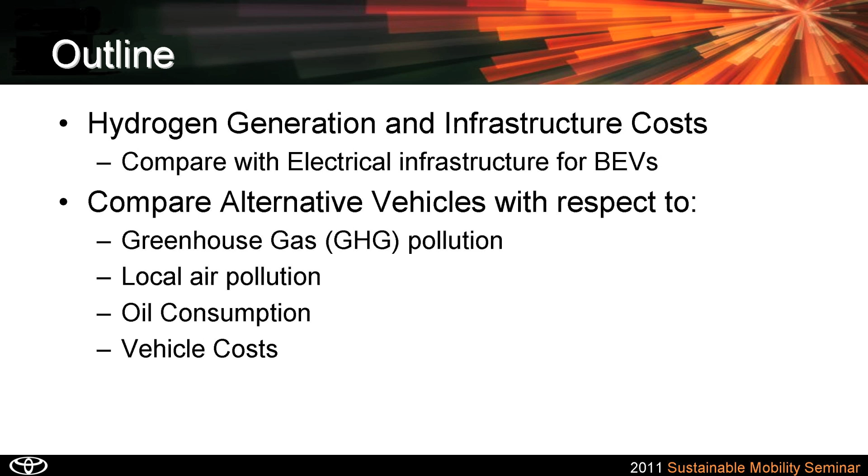Well, this is the outline I'm going to be using. Your program says I'm going to talk about hydrogen infrastructure, but I have a lot more information too. Number one, I'm going to compare hydrogen infrastructure costs with the cost of electrical infrastructure for battery electric vehicles. And I'm also going to compare alternative vehicles with these four attributes.

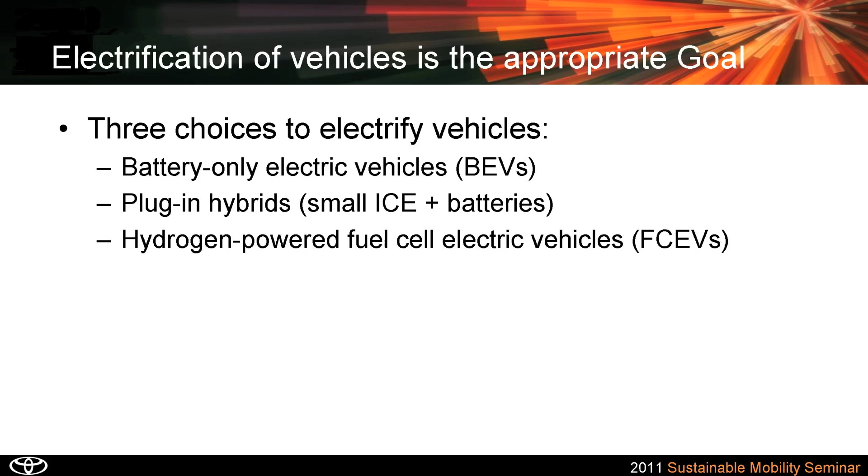I'm going to start off by saying we agree with the Obama administration that we need to electrify the vehicle in the United States. However, to power electric vehicles, there are three options. We can have battery electric vehicles, as you all know, and plug-in hybrids. Of course, the administration supports those two, but they've totally neglected, or tried to kill, the hydrogen-powered fuel cell vehicle program, which is another way to drive electric vehicles.

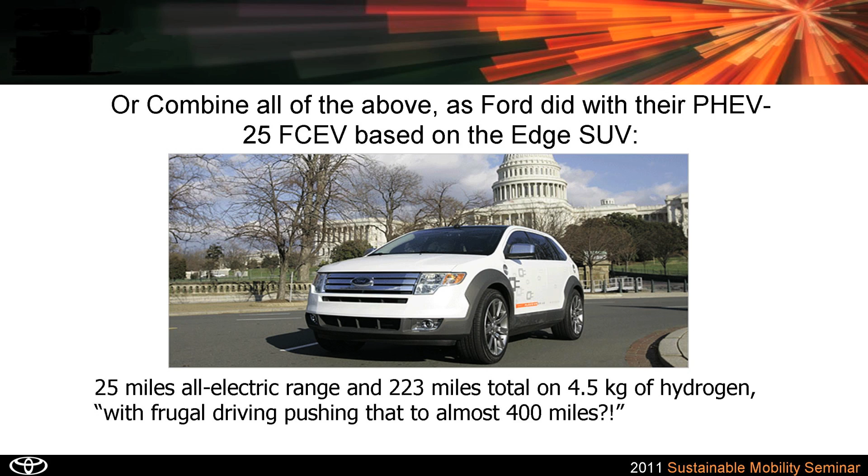In terms of plug-in hybrids, to the best of my knowledge, this was the very first plug-in hybrid electric vehicle made by a major auto company. But this happens to be a Ford fuel cell electric vehicle. They put a bigger battery in it, so it had 25 miles all-electric range. I had the privilege of driving this around Washington, D.C. several years ago, which was quite an experience.

I have two sources of data in this presentation. One are the simulation models that were referred to, put together by the National Hydrogen Association. And also I'm going to refer to data from the McKinsey & Company report on alternative vehicles in Europe.

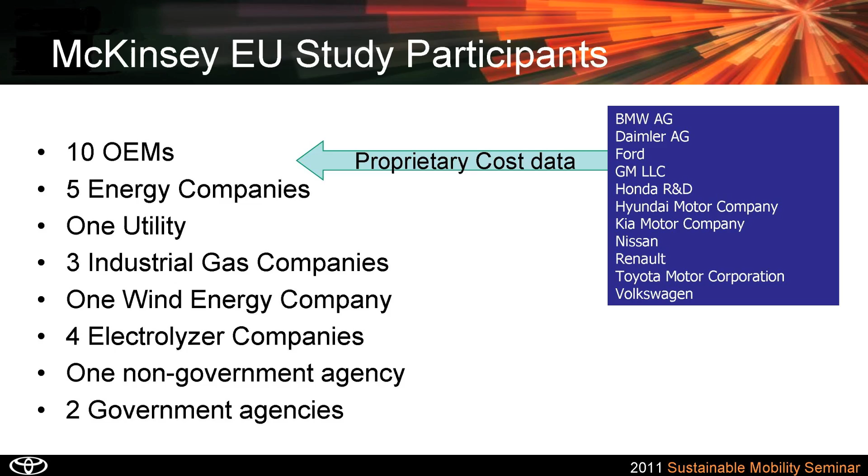The McKinsey report had even more participants. In particular, they had the participation of 10 OEMs, automobile companies, the 10 major companies. And why that's important: the auto companies provided proprietary cost data to the McKinsey analysts. So when I get toward the end of my presentation and talk about the cost estimates from McKinsey, I think they have particular credibility.

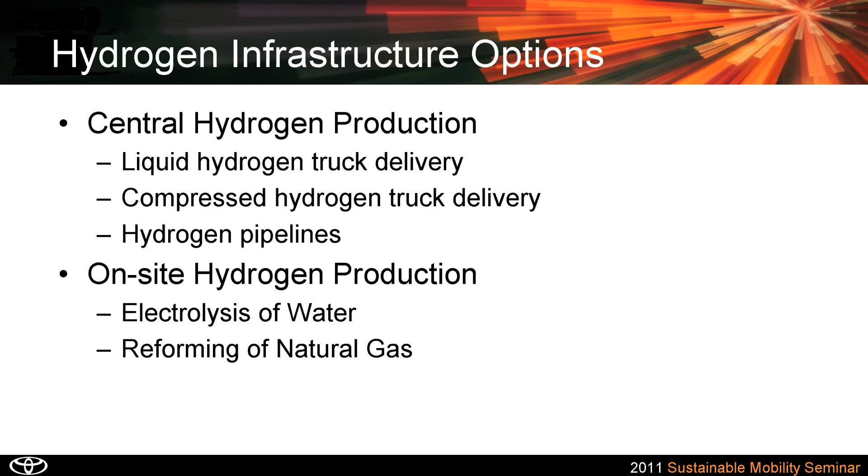In terms of hydrogen infrastructure, most of you probably know this, but almost all hydrogen today is made at a central production plant, mostly by steam methane reforming. But once you make the hydrogen, you have to deliver it. In the United States, there are three major ways: you liquefy the hydrogen and deliver it by truck, you compress it and deliver it in a tube trailer, or you build hydrogen pipelines. All three of those transportation options are used in the United States, delivering thousands of kilograms of hydrogen to industrial users every year.

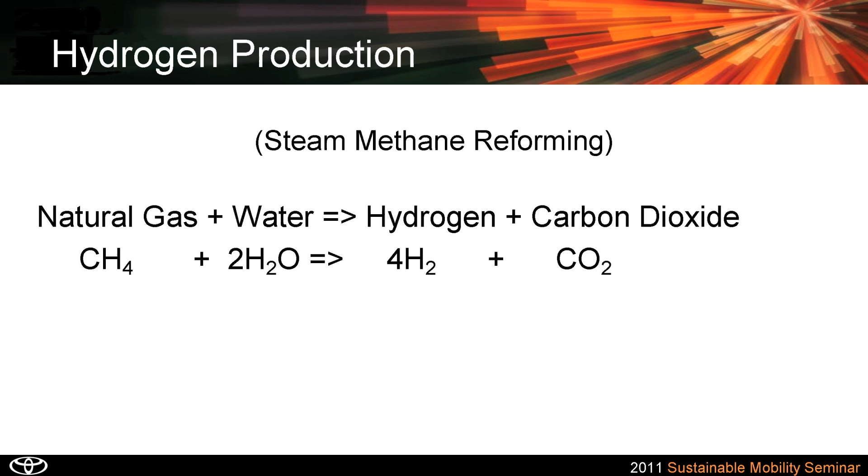But for refueling vehicles, you can also have on-site production, either by electrolyzing water or by steam methane reforming of natural gas. In terms of steam methane reforming, you use natural gas plus water to produce hydrogen, and here's the chemical equation for that. The reason I put this up here is to demonstrate that one carbon atom produces 4 hydrogen molecules.

And that's important because half the hydrogen comes from the methane and half comes from water. So you might say that this is already 50% renewable. And that's one of the reasons if you use hydrogen made from natural gas in a fuel cell electric vehicle, you cut greenhouse gas emissions by about 50%.

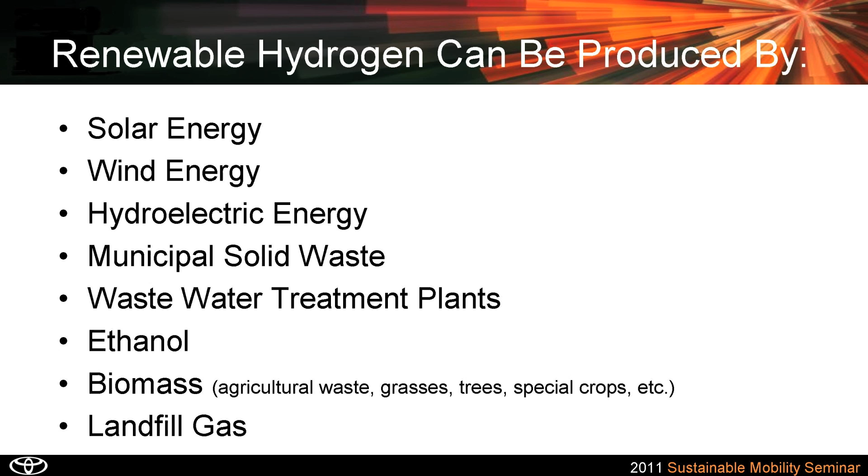This is a chart put together by Charlie Freese at General Motors showing the hypothetical upper bounds of what you can do. For example, from biomass, you could produce enough hydrogen for 395 million cars, about 3 times the US car fleet. Solar: 21 billion cars, or 16 times the US car fleet. Wind: 9 times the US car fleet. And geothermal: about 2 times the US car fleet.

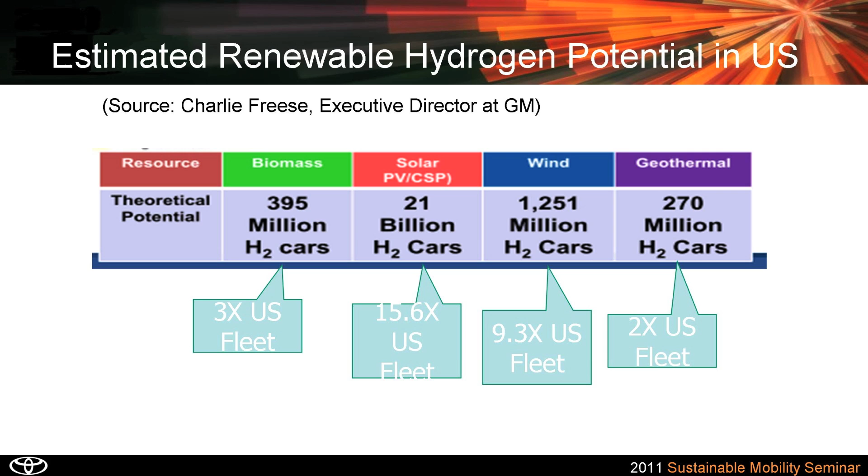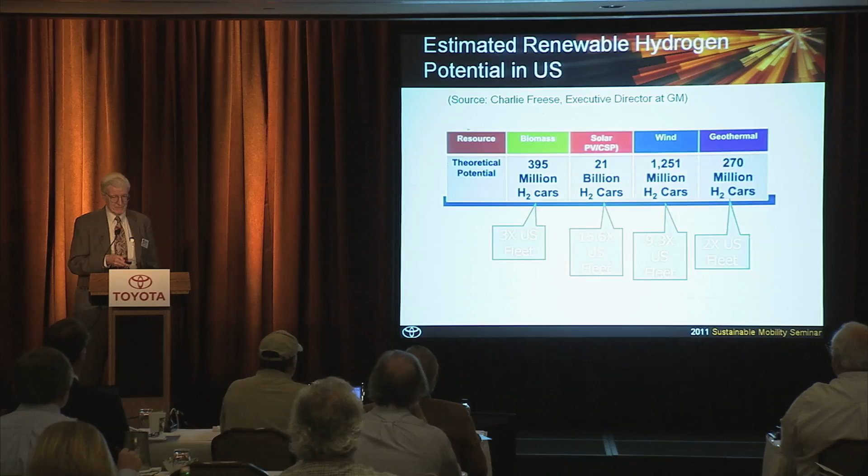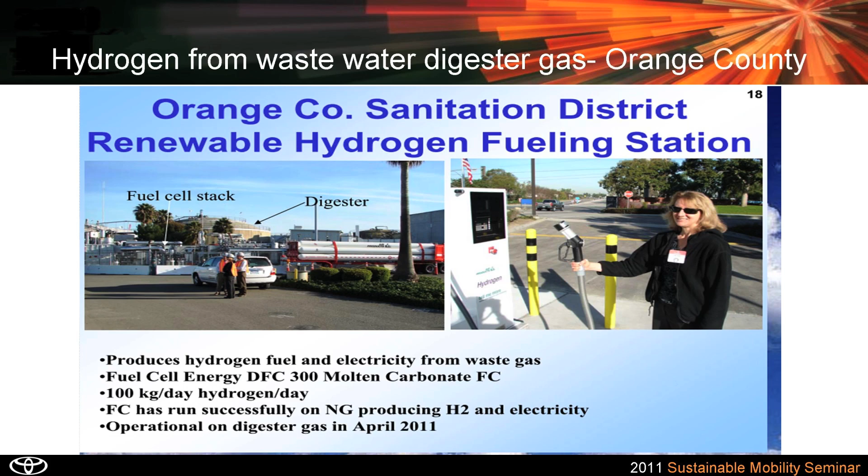But Charlie did not include one option that's already being used up here in Orange County, and that's to use the anaerobic digester gas from a wastewater treatment plant. This station is up in Orange County, and basically they take the digester gas and run it through a molten carbonate fuel cell. Dr. Samuelson, I see, will be talking more about that a little bit later.

They use about 75% of the energy to produce electricity to run the wastewater treatment plant, which saves them hundreds of thousands of dollars a year and also cuts down the carbon footprint substantially. But they use the other part of the digester gas to make about 100 kilograms per day of hydrogen, which is enough for about 160 fuel cell vehicles. So this is in operation up in Orange County. For those of you that live in Orange County, remember: every time you flush the toilet, you're contributing to hydrogen fuel.

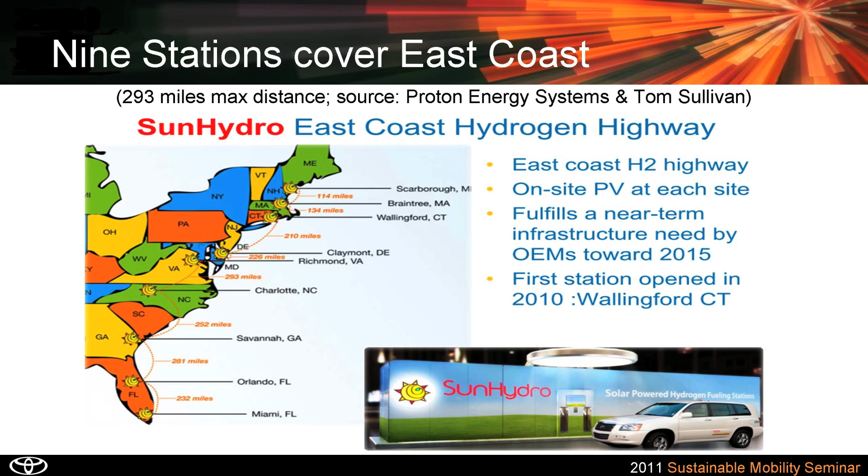And when he finishes installing all 9 of his stations, you'll be able to travel all the way from Maine to Miami in a fuel cell vehicle.

Now this is the device that we developed at H2Gen, a small-scale steam methane reformer. Again, it takes natural gas and water and produces pure hydrogen.

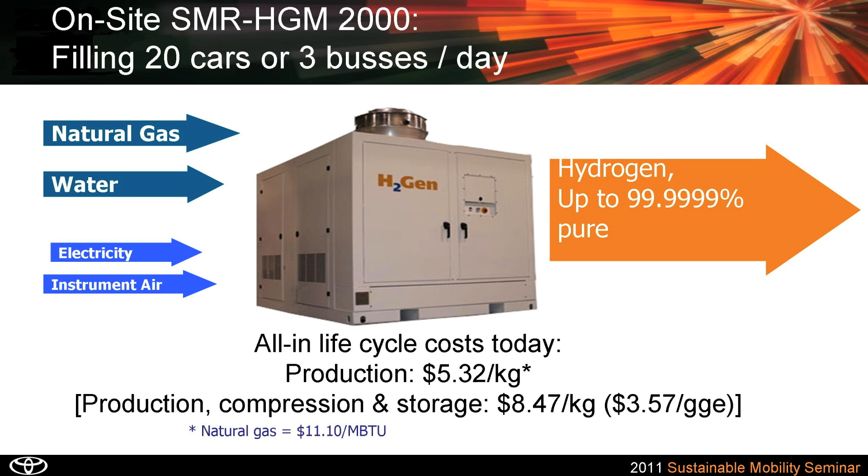These are the prices we can produce hydrogen today, about $5.32 per kilogram, assuming natural gas is $11 per million BTU. Of course, it's much lower than that today. If you add compression and storage, which we didn't supply, the total cost we estimate is about $8.50 per kilogram, equivalent to gasoline at about $3.60 per gallon on a range equivalent basis.

We also developed this unit with 5 times higher output, and with that we could get down to about $2.10 per gallon of gasoline on a range equivalent basis.

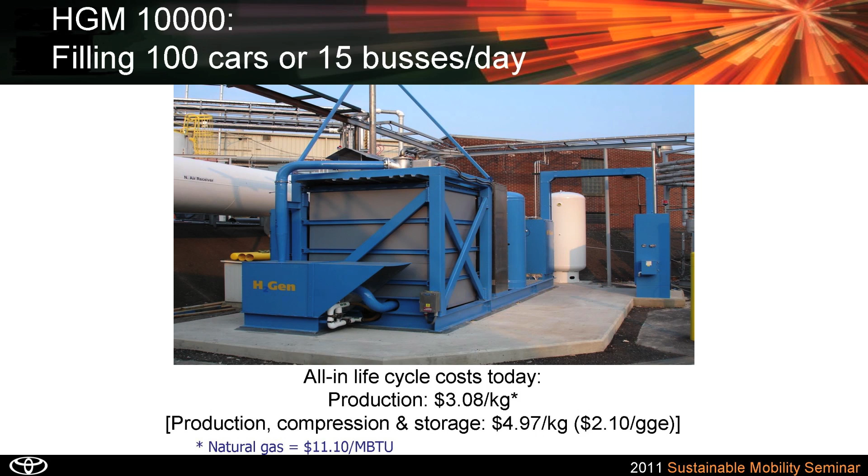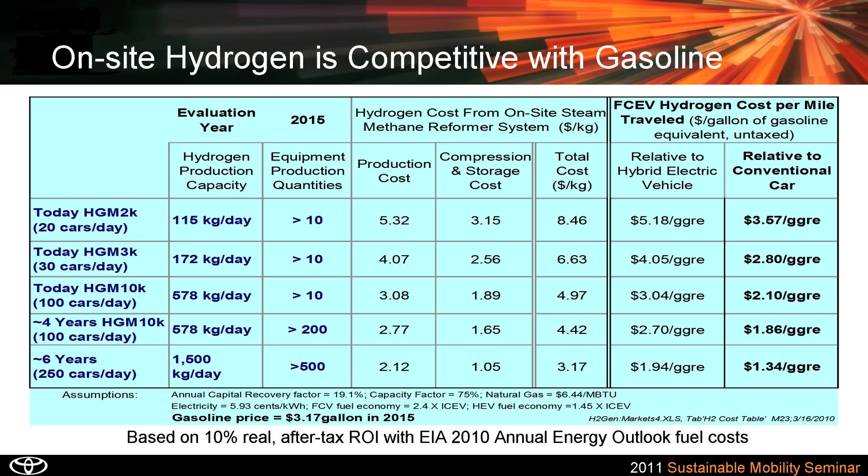This is a very busy chart that's in your handouts. Here's the $2.10 and $3.60 per kilogram, per gallon of gasoline equivalent, assuming we build just 10 units, which was about our production volume in 2009. If you go up to 200 to 500 units, we're estimating we can get the cost of hydrogen down to $1.34 to $1.86 per gallon of gasoline equivalent. So we believe that hydrogen is already cost competitive with gasoline.

Now I want to bring you up to date with the status of fuel cell electric vehicles. Many of the Toyota vehicles are in the NREL Learning Demonstration Project. They've actually analyzed 155 fuel cell vehicles now in the fleet.

They have looked at refueling at 24 hydrogen stations, 15 of which are in California. These cars have now traveled, they just passed the 3 million mile mark a couple months ago. These are driven in ordinary day-to-day driving by ordinary citizens, who have refueled over 27,000 times with high pressure compressed hydrogen, without any major incidents.

So that's the status of the DOE's evaluation of on-road experience with 155 fuel cell electric vehicles. And of course, I know Toyota's collecting data, as we heard at lunch, for the RAV4, but we don't have those data yet on battery electrics nor plug-in electric vehicles.

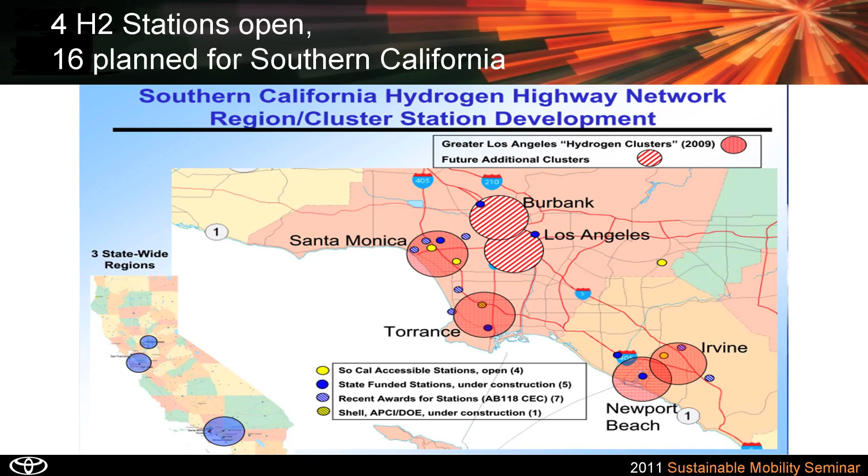Here are the stations that were in the program in Southern California. 4 of these are still available now for public refueling of hydrogen vehicles, and 16 are either under construction or funding has been allocated by CEC to build them, so there'll be a total of 20 stations in the Southern California area in the next few years.

In terms of fuel infrastructure costs, these are the economic assumptions we used in our model. We assume the government pays for 30% of the hydrogen stations, which is the current law - probably won't survive this week and certainly not the next couple months, but anyway, that's the current law. We assume industry pays the other 70%, and we required that industry earn at least a 25% internal rate of return initially, dropping to 15% when capacity factors get higher.

In terms of cost, initially we're assuming $1 million to $2 million for the fueling station, dropping to maybe $243K to $1.2 million when you get to larger scale production.

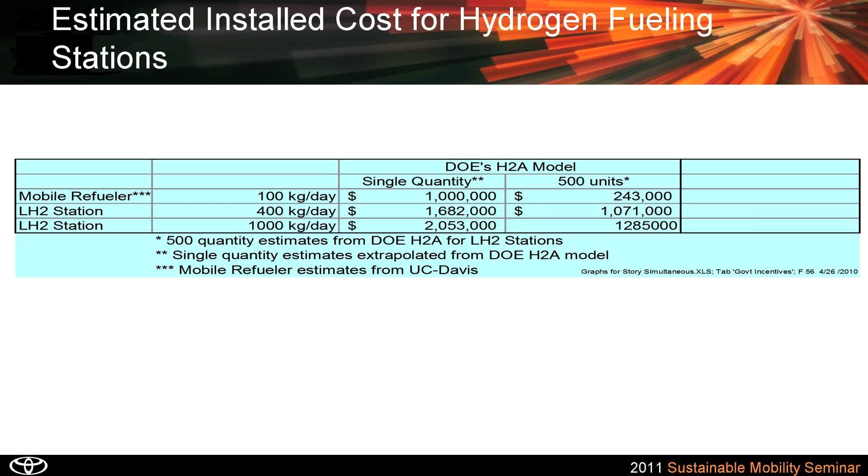For the electric charging infrastructure, we used the recommendations of the Electrification Coalition, a group of organizations promoting the use of plug-ins and battery electric vehicles. They recommended we needed 2 public outlets for each battery electric vehicle initially to overcome range anxiety with potential customers.

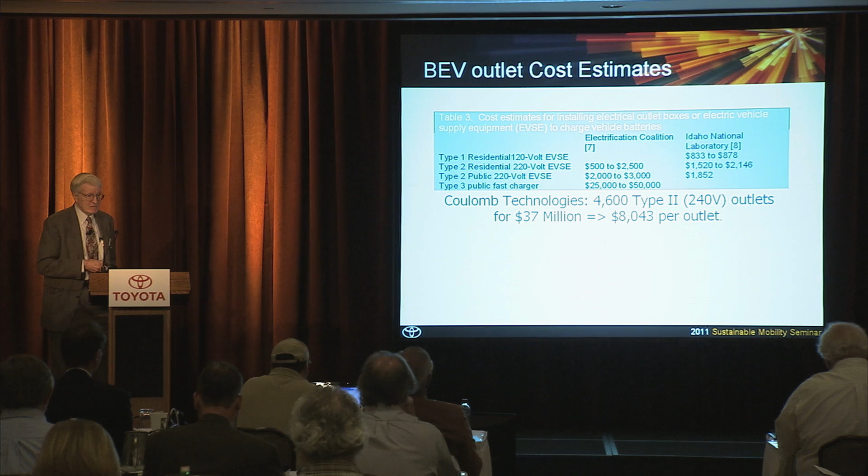In terms of the cost of electric outlets, we used $2,000 to $3,000, the Electrification Coalition estimate. Idaho National Lab estimated about $1,800 per outlet. But when we look at reality, Coulomb Technologies is in the process of installing 4,600 Type 2, 240 volt outlets for $37 million, which comes out to about $8,000 per outlet. Now, since I made this slide, I learned that Hawaii is putting in 250 outlets at a cost of $4.6 million, which works out to $18,400 per outlet.

Now, the Electrification Coalition in their roadmap requested the government spend $120 billion over 8 years to put in enough electrical charging outlets for battery electric vehicles.

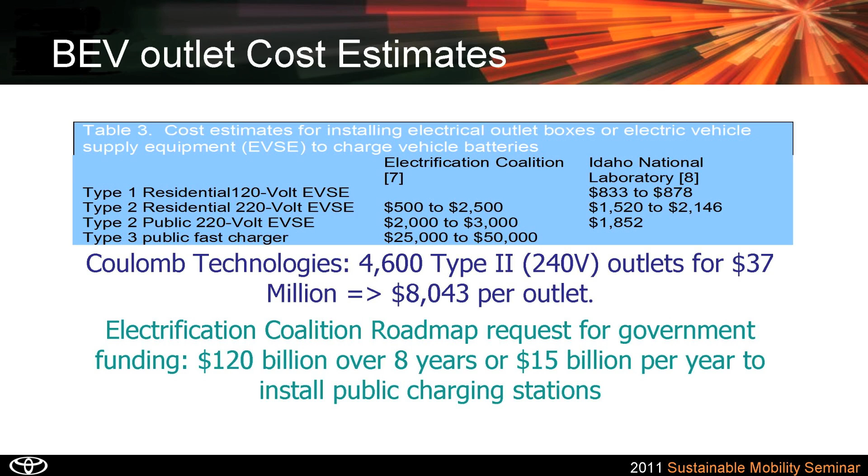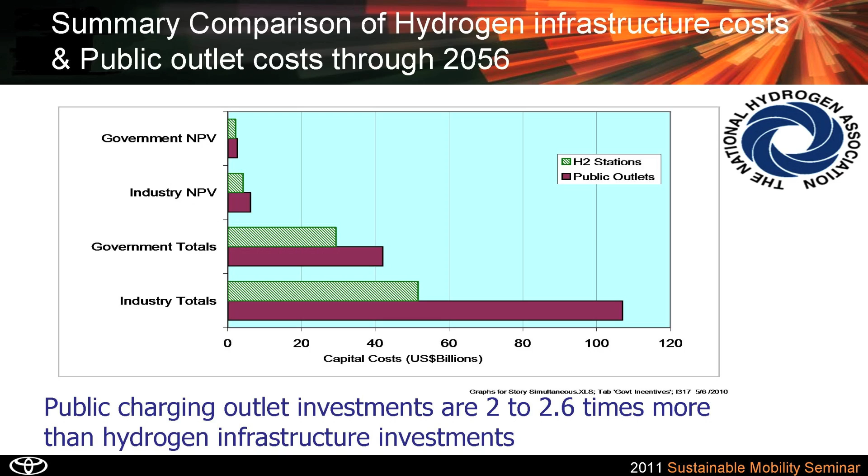So these are the results from the NHA study. The green bars are the cost of hydrogen infrastructure. The red bars are the cost of the electrical infrastructure for government and for industry. And you can see the electrical infrastructure costs more.

Now, these are the results from the McKinsey report that I referred to earlier, and they have even more astounding results. They estimated that to put in a hydrogen fueling infrastructure for the entire European Union would cost about 101 billion euros over 40 years. But to put in enough electrical outlets for battery electric and plug-in hybrids, they estimated it would cost 5 times as much, 540 billion euros.

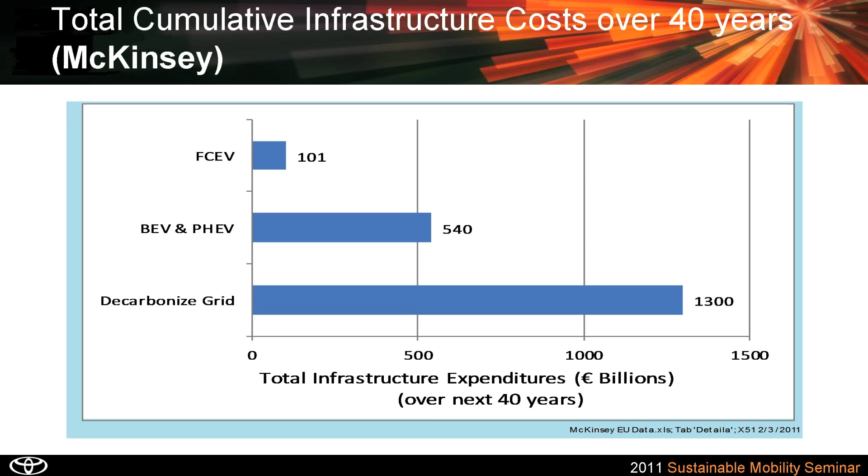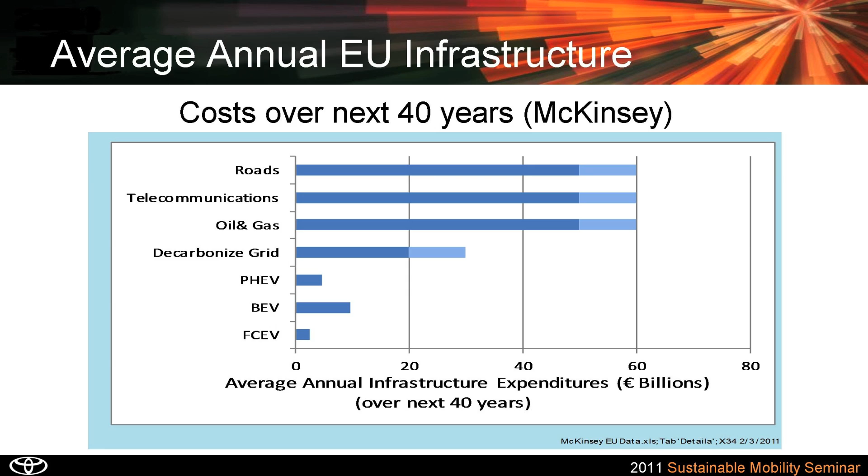Now, those are the cumulative infrastructure costs. McKinsey also pointed out that in Europe, every year, they spend 50 to 60 billion euros for roads, the same for telecommunications, and 50 to 60 billion also for oil and gas infrastructure. So putting in a hydrogen infrastructure is negligible compared to what's already spent on infrastructure. And even the battery and plug-in hybrid infrastructure is small compared to what is spent on other infrastructure projects in the EU.